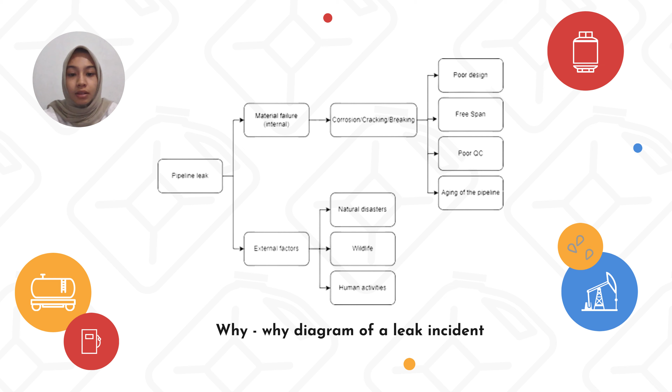The cause of the pipeline leak incident at PT Pertamina Hulu Energi remains uncertain, as the company has yet to release any official findings and is only able to provide suspicion and information on their handling of the incident. The following diagram illustrates the key factors that contribute to the pipeline leak in general.

Health, safety, security, and environment is a critical aspect in industrial and energy sectors. This study incorporates HSSE principles in analyzing a pipeline leak incident in Karawang. Using the structured what-if technique, or SWIFT, the study will identify potential hazards and create a report to optimize safety-related activities. The observation will include all aspects and components of oil and gas distribution using pipelines.

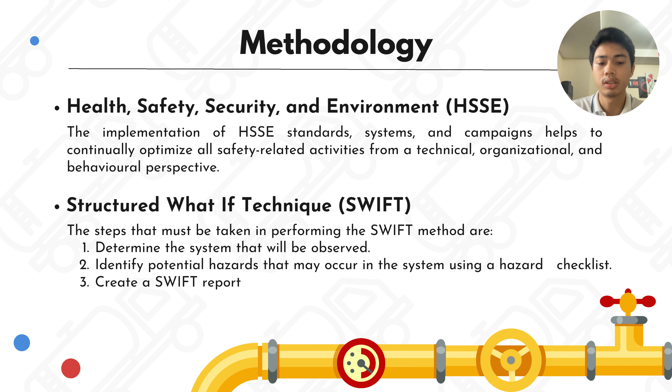Steps of SWIFT: first, determine the system that will be observed. Second, identify potential hazards that may occur in the system using a hazard checklist. And lastly, create a SWIFT report.

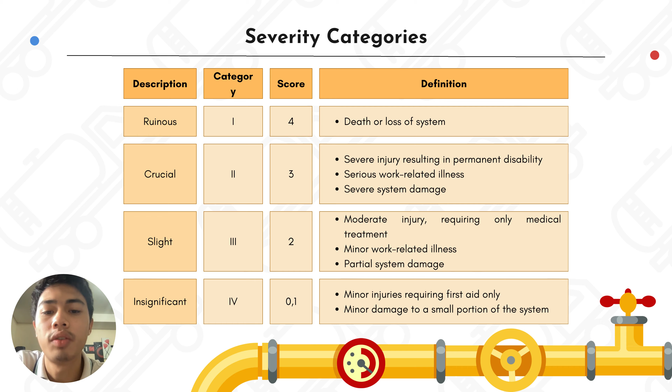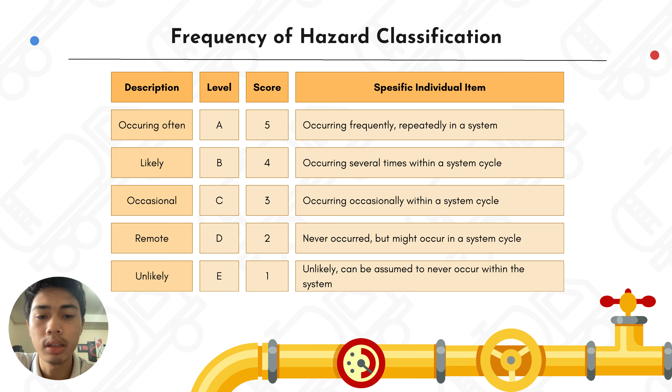Here stated is the severity categories used for this research. There are 4 categories: ruinous, crucial, slight, and insignificant, along with the category and score for this research. Next, the frequency of hazard classification table consists of 5 categories: occurring often, likely, occasional, remote, and unlikely, with descriptions as stated.

Next, the RRN method will be used in the process. Risk rating number, or RRN, is a method used to calculate the overall risk value generated from a hazard source, using the equation RRN equals DPH times LO. DPH is the severity of the hazard, and LO is the frequency of the hazard's occurrence.

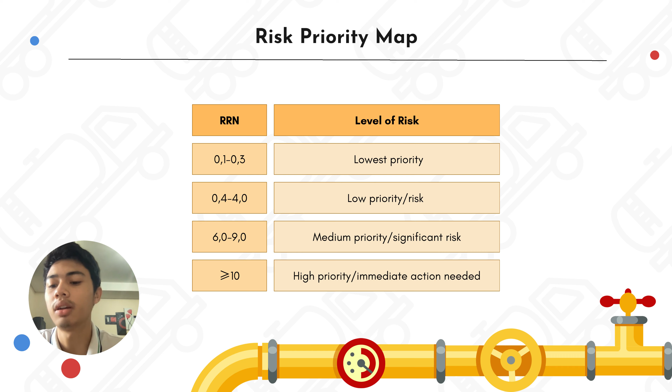Based on the results of the risk priority map, recommendations for improvement are made to anticipate potential hazards that may arise in each aspect of oil and gas distribution using pipeline.

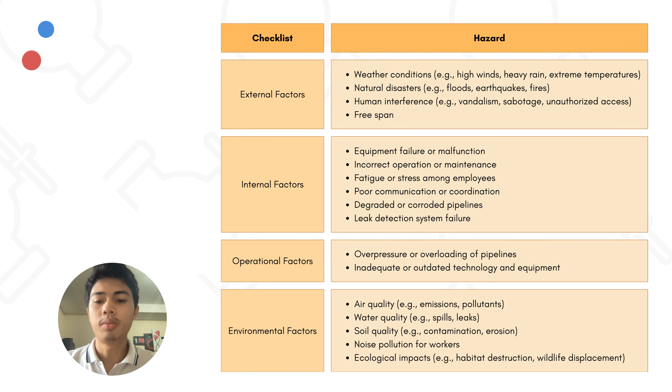The observed system in the study is the operational activities and aspects of an oil pipeline, including monitoring and maintenance, regular inspections and maintenance, testing and verifying pipeline integrity, identifying and addressing potential hazards, conducting safety drills and emergency response training, coordinating with other departments and stakeholders, and keeping records of all activities, malfunctions, and incidents.

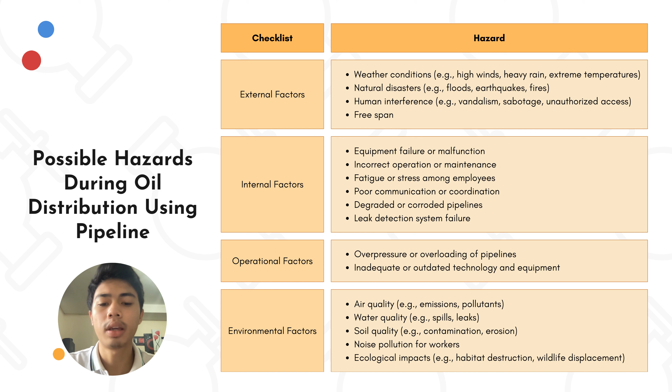Potential hazards that may occur during the operation of an oil pipeline were identified through brainstorming and literature review, as outlined in the table below.

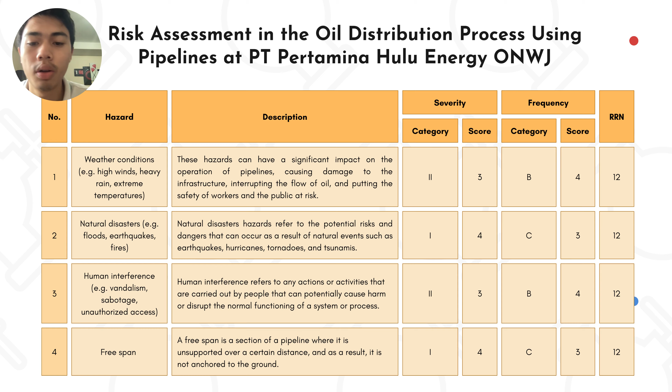For the next part is the risk assessment in the oil distribution process using pipelines at PT Pertamina Hulu Energy ONWJ. Here is stated the hazards, description, the severity and frequency, and also the result of the risk RRN value.

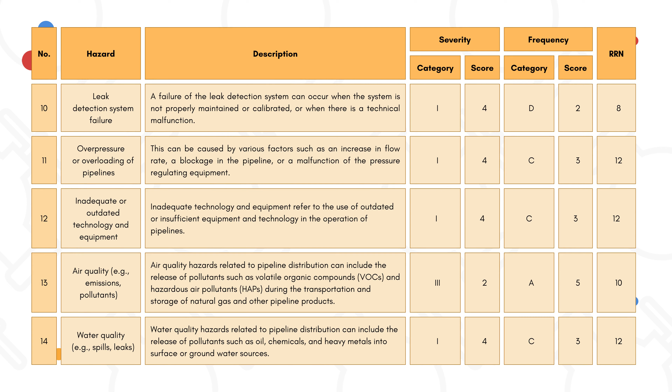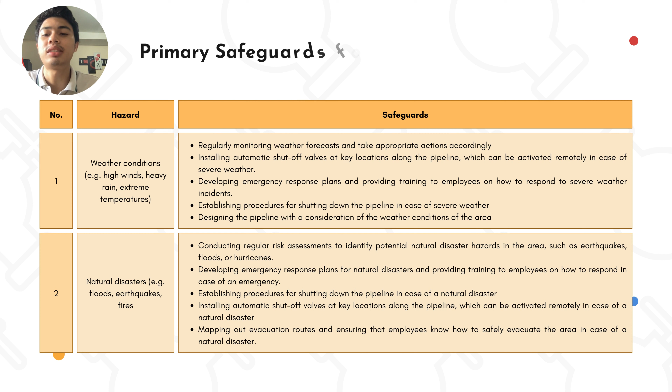Moving on to the next step of SWIFT, safeguard is a proposal of recommendation used to minimize hazards that occur during operational activities. The creation of safeguard is the final step in the SWIFT report, and the top priorities with RRN greater than or equal to 10 are shown in the table below.

First, the hazard of weather condition. Its safeguard is regularly monitoring weather forecasts and taking appropriate actions, installing automatic shut-off valves at key locations along the pipeline, developing emergency response plans and providing training to employees, establishing procedures for shutting down the pipeline in case of severe weather, and designing the pipeline with consideration of the weather conditions of the area.

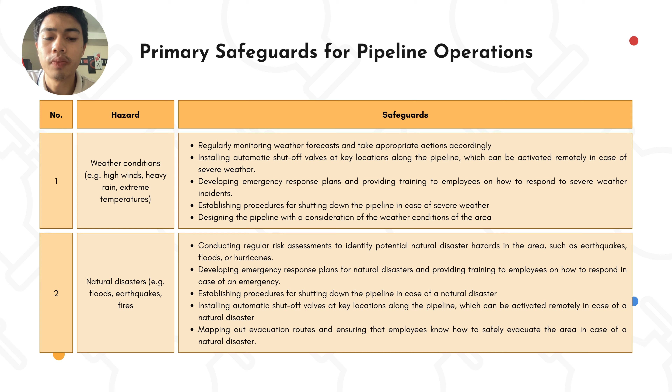Next, natural disaster. Its safeguard is conducting regular risk assessments to identify potential natural disaster hazards in the area, developing emergency response plans for natural disasters, establishing procedures for shutting down the pipeline in case of a natural disaster, installing automatic shut-off valves at key locations, mapping out evacuation routes, and ensuring that employees know how to safely evacuate the area.

Next, for human interference, its safeguards are installing surveillance cameras and monitoring systems along the pipeline, implementing security protocols and procedures such as background checks, and establishing procedures for reporting and responding to incidents of vandalism, sabotage, or unauthorized access, and providing training to employees on how to identify and report these incidents, conducting regular security audits and assessments to identify vulnerabilities and implement appropriate safeguards, and creating a system of access control and security.

For free span, its safeguards are regularly inspect for any sign of stress or damage on the pipeline, use advanced technology such as ultrasonic to detect free span and take action before it causes damage, monitor the pipeline for any unusual movements or vibrations, implementing procedures for maintenance and repair of free span areas as soon as they are detected, and conduct regular hydrodynamic analysis of the pipeline to detect and predict free span issues.

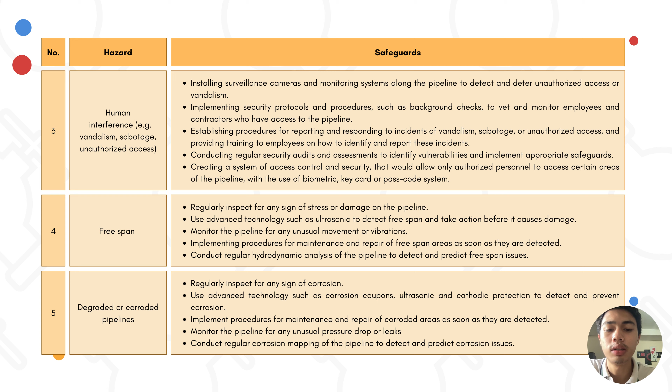And for degraded or corroded pipelines, its safeguards are regularly inspect for any sign of corrosion, use advanced technologies such as corrosion coupons, ultrasonic, and cathodic protection to detect and prevent corrosion, implement procedures for maintenance and repair of corroded areas as soon as they are detected, monitor the pipeline for any unusual pressure drop or leaks, and lastly, conduct regular corrosion mapping of the pipeline to detect and predict corrosion issues.

For the overpressure or overloading of pipelines hazard, its safeguards are use pressure regulating valves to control and monitor pressure, implement procedures for regular testing and maintenance of the pipeline, have emergency response plans in place in case of overpressure situations, train workers to recognize and respond to overpressure situations, and have automatic shut-off valves in place to prevent overpressure.

Inadequate or outdated technology and equipment, its safeguards are conduct regular testing and maintenance of equipment and technology, continuously monitor and evaluate the performance of equipment and technology, keep equipment and technology updated with the latest industry standards and advancements, implement procedures for the proper use of equipment and technology, and regularly train workers on the proper use and maintenance of equipment and technology.

For air quality hazard, its safeguards are implement procedures for regular monitoring of air quality, use advanced technology such as air quality sensors to detect and prevent air pollution, regularly train workers on the proper use and maintenance of equipment and technology to prevent emissions, have a plan in place for emergency response in case of air quality incidents, and lastly, continuously evaluate and improve air quality management systems to reduce emissions and pollutants.

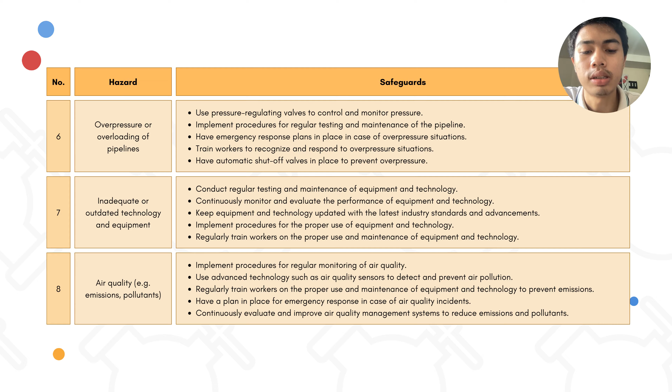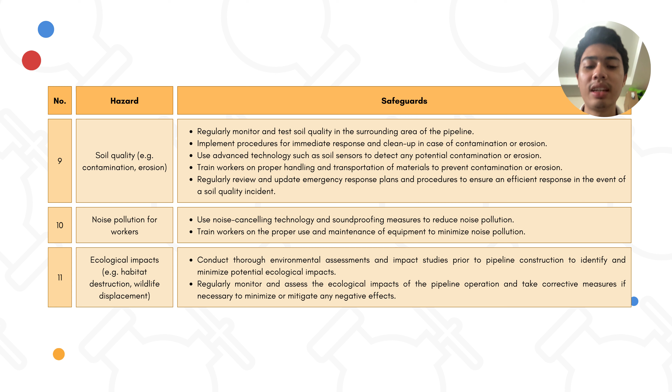Okay, that brings us to the end of the discussion. To quickly recap, I'd like you to remember these key points. The SWIFT method is effective in identifying hazards in an oil pipeline system and provide recommendations to minimize these hazards.

The incident of pipeline leak at PT Pertamina Hulu Energy ONWJ in Karawang in 2019 was suspected to be caused by pressure anomalies. To prevent similar incidents in the future, the company should implement safeguards such as pressure regulating valves, regular testing and maintenance, emergency response plans, worker training, and automatic shut-off valves.

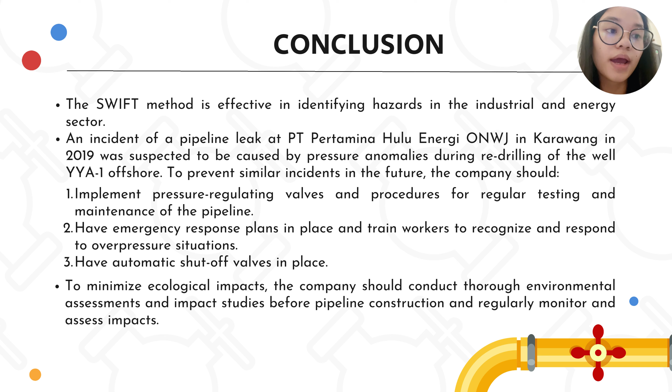In the second, PT Pertamina Hulu Energy ONWJ should be more transparent with the public about the cause of incidents to promote trust and understanding and provide valuable information. Therefore, the future research are the first.